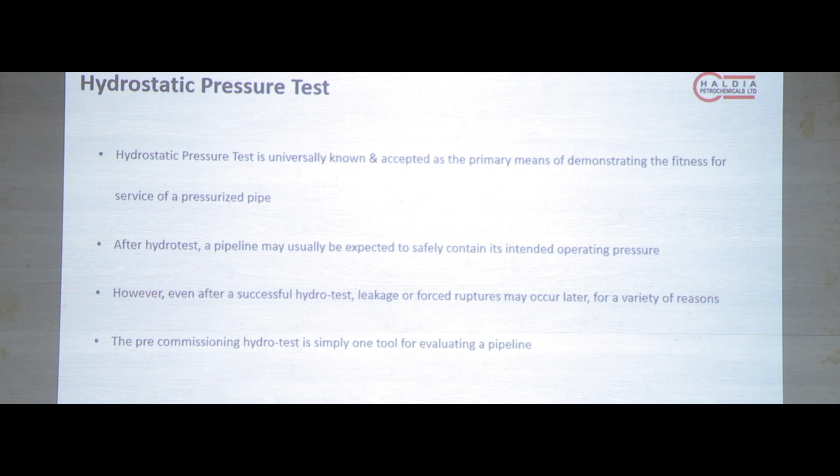No, for this distribution pipe also, you can collect or procure the sample on random basis, and you have to do all these tests, particularly for hydrostatic test. From this test you can identify whether a weak point is there or not. But should we do it before connecting the PPR pipe? Obviously you should do it. Otherwise, how can you assure that the pipe material has been supplied good quality or bad quality?

But our system should withstand the pressure along with the tap connection. Ultimately, so why should we do it before tap connection? My question is that because our system is to run with the all tap connection and that. Tap connections need a network, sir, network.

After forming the pipeline network, it will be very difficult for you to carry out this test. You cannot take out the pipe and do the testing. And these are standard tests and accelerated tests, and that is why these tests are mentioned in the standard.

Before laying up, starting the service, before laying up, to ensure the product quality during service.

No, I understand that, sir, but our system has to run along with all the tap connection and others. So it should carry the pressure at that time only.

My question is, when the standard is formulated or it is specified, these tests are specified in the standard, keeping in mind all these requirements, taking into consideration all these requirements. So once these tests are passed, that means it satisfies your requirements as per the BIS standard, and if these tests are passed, it means it will perform okay during the service life.

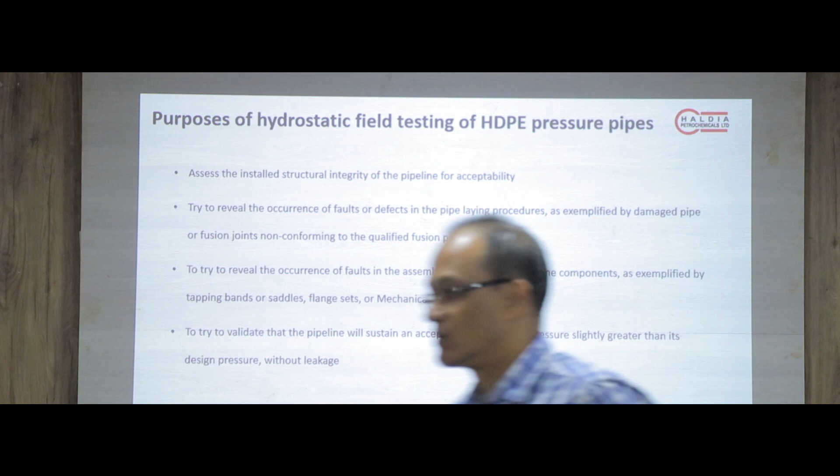It tries to reveal the occurrence of faults or defects in the pipe laying procedures, as exemplified by damaged pipe or fusion joints non-conforming to the qualified fusion procedures. During the laying up and jointing, if there is any minor fault, that may show up in the failure of the pipes, premature failure of the pipes.

It also tries to reveal the occurrence of faults in the assembly procedures for pipeline components, as exemplified by tapping bands or saddles, flange sets or mechanical joint assembly. This is also to validate that the pipeline will sustain an acceptable level of overpressure slightly greater than its design pressure without leakage.

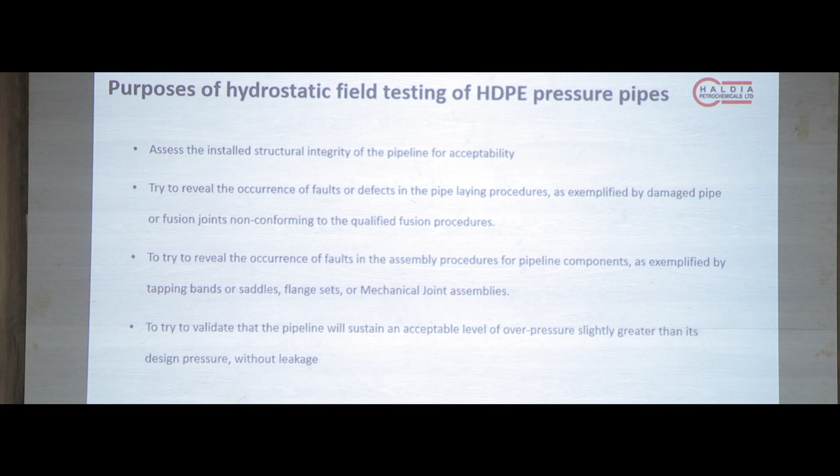Now, the concept behind hydrotesting is to strain the pipes, fittings and accessories. To strain the pipes means by putting the pressure, by inducing hoop stress, we put pressure in those areas to ascertain that there will not be any failure during the service life or during the transportation of the pressurized fluids. It may be water or it may be slurry or any other solvent.

During the service life, that should not show up, should not lead to failure of the product. So any defect from manufacturing is typically forced by stress intensification, which I was mentioning earlier. If there is any defect during manufacturing, it shows up, and that point acts as the weaker point, known as the stress concentration point, where the stress is concentrated, and that leads to premature failure.

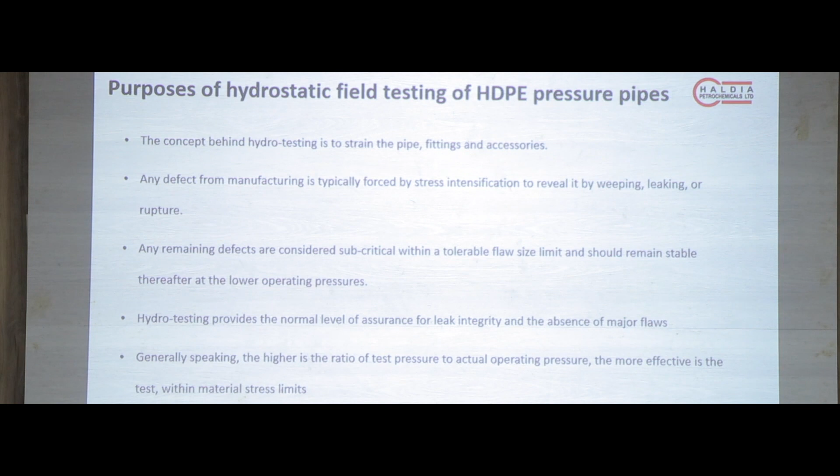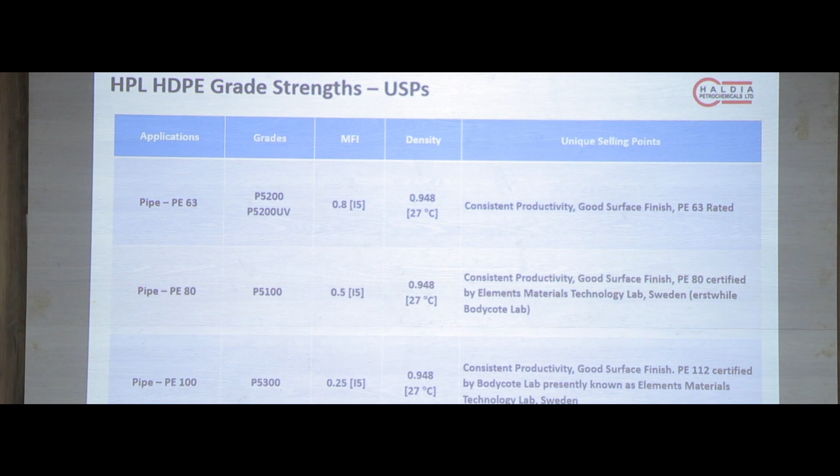These are our grades. These three grades we produce for three applications: PE 63, PE 80 and PE 100. The grades are P5200, P5100 and P5300. The MFI and density are mentioned. These grades are very much appreciated by the manufacturers and are performing very well in the respective areas of application.

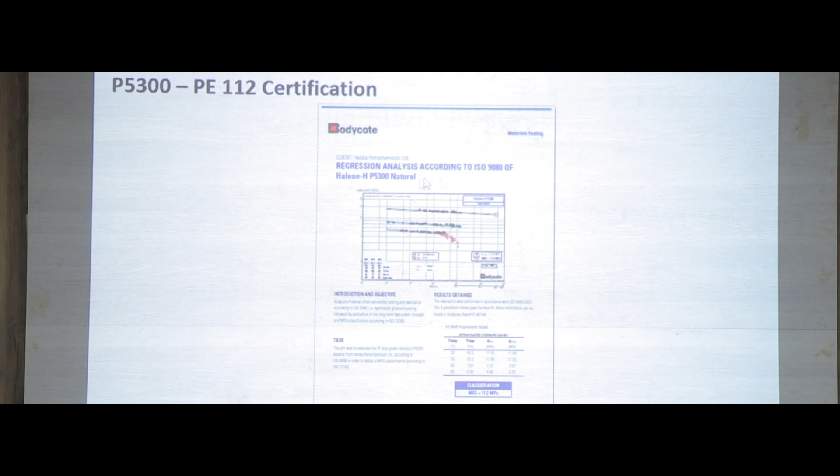This I have already shown you. This also I have already shown you. This also I have shown you. These are the advantages which I have mentioned so many times during the entire session.

This is a very lightweight and flexible pipe, easier to handle, long lengths can be laid in short time. HDPE pipe saves and conserves water compared to metal pipes, the chances of leakage will be minimum, and this is commonly joined by heat fusion.

Excellent hydraulic characteristics, extremely smooth inner surface, non-corrosive. Being a flexible pipe, it is softer and has certain elongation properties for which it can adjust its shape if there are any pressure surges during the transportation of the liquid during the service life.

There is a provision of socket joints also, but normally it is not done. The socket joints are put during repairing of any joints. Mostly those are for repair joints.

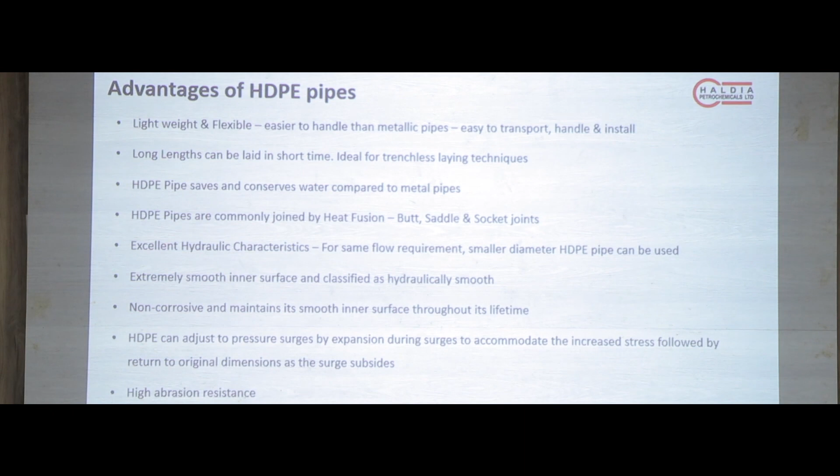The abrasion resistance of the pipes is very high, and that is why the energy requirement is very low. As a result, you may consider that the carbon footprint will be lower.

No corrosion. It is highly resistant to corrosive chemicals and corrosive solvents. And there will be minimum chances, or almost negligible chance, of biological growth or root intrusion in the pipes.

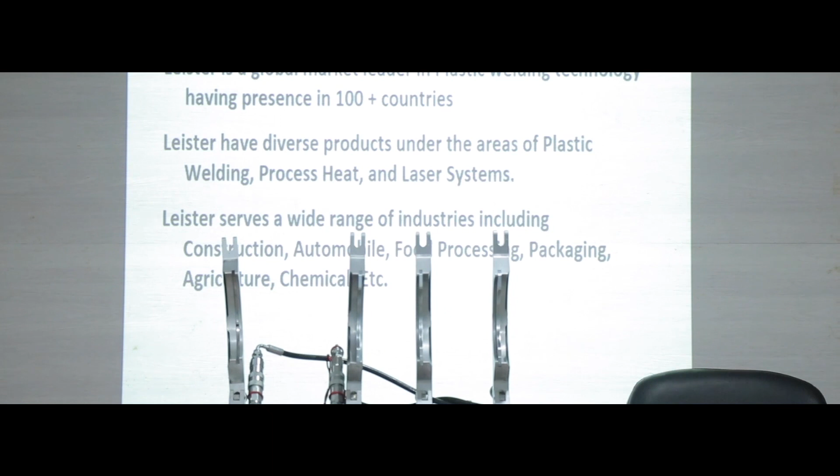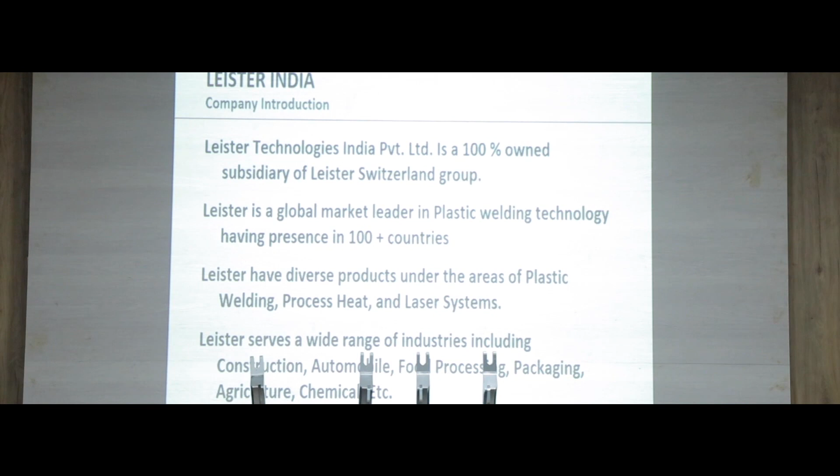We are Leister Technologies India Private Limited, a Switzerland-based MNC company. Leister India is completely owned by the Leister Switzerland Group. We are into plastic welding technology, and we have everything for plastic welding, right from flooring to roofing, furniture, automobile, and every other plastic welding application - we have machineries for all of them.

In India, Leister and Ritmo, an Italian company, has a strategic collaboration for selling plastic pipe welding products. Our relationship started from 2005, and before that, since the early 90s, Leister Ritmo has had a presence in India through major government agencies.

Coming to Ritmo, it is a pioneer in plastic pipe welding technology. This company has more than 4 decades of expertise in plastic pipe welding. We have been supplying HDPE butt fusion, electrofusion jointing machines to various industries, right from potable water, gas networks, industrial pipeline, desalination, etc.

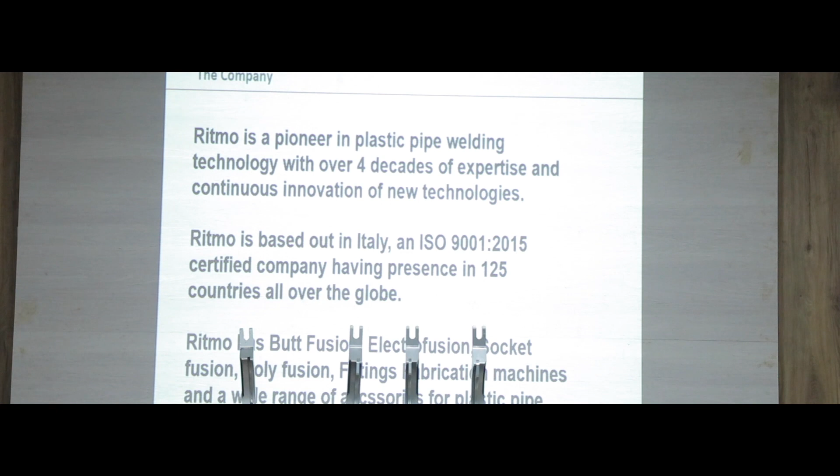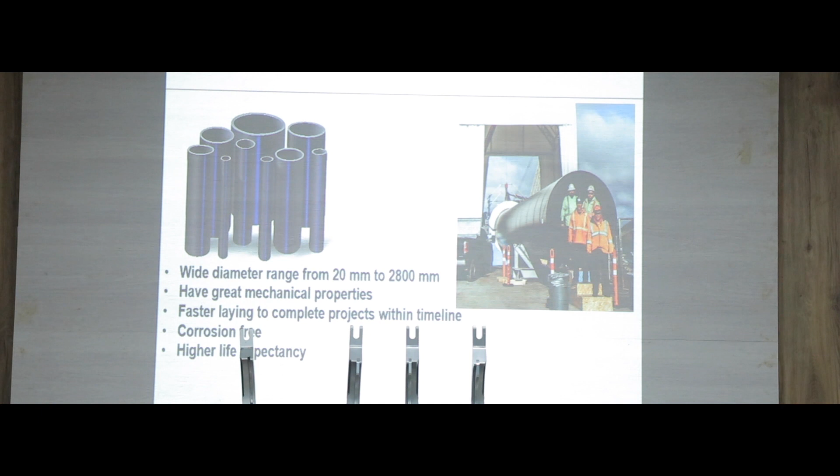So firstly, today our main agenda is to see the PE pipe joint. PE is nothing but polyethylene. Earlier, the Haldia team has explained completely about polyethylene and their properties, the resin characteristics and raw material characteristics, and everything. Thanks for this detailed explanation.

We'll just quickly see the main advantages of using PE for potable water networks. These pipes are being manufactured in wide diameter ranges, starting from 20 mm up to 2,800 mm, but right now in India the maximum is 2 meters in diameter. These pipes have great mechanical properties which can withstand field conditions, and this also helps in laying it faster in the field.

The projects can be completed very much within the timeline. As we know, the Jal Jeevan Mission projects are being framed into a shorter time duration. HDPE pipe is very much feasible to complete the projects. And moreover, these pipes have a higher life expectancy because they are corrosion free and have other mechanical properties compared to metal pipelines.

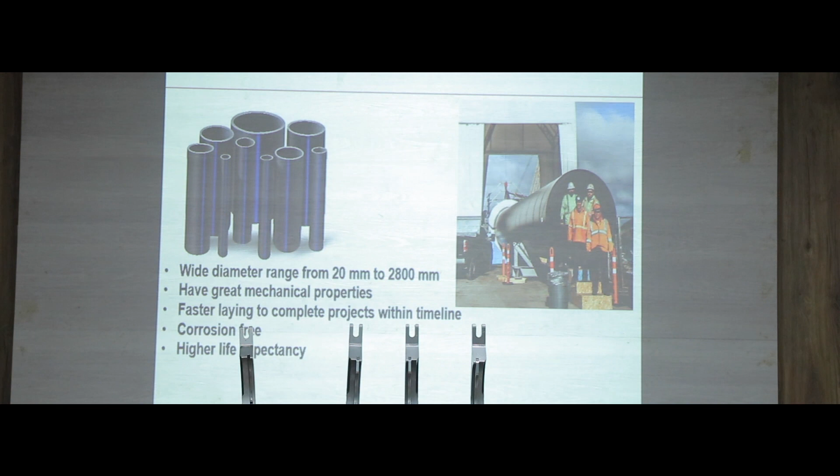HDPE or any PE pipes basically come under the polyolefin group, PE and PP, polyethylene and polypropylene. PE pipes can only be joined with the thermal jointing technique. Thermal jointing is the only way to join any polyethylene pipe, whether it is HDPE, that is high density polyethylene, or medium density or low density.

In water pipeline, the majorly used pipeline is high density polyethylene, which usually comes in black color with a blue stripe. As the earlier team explained, this blue stripe indicates water pipeline. Similarly, gas pipelines have a yellow stripe. So the first fusion process for polyethylene is butt fusion. Butt fusion, as the name itself means, is butting the two faces of the pipes, like this.

So this is the best jointing technique, because it is as good as a single extruded pipe. Suppose we are jointing 6 meter lengths of pipes: 6 meter plus 6 meter becomes a single 12 meter pipe. This is actually a seamless joint. Once we remove it, it forms a bead. I will show you during the demonstration. It forms a bead, but when we cut open the bead, this becomes as good as a single extruded pipe.

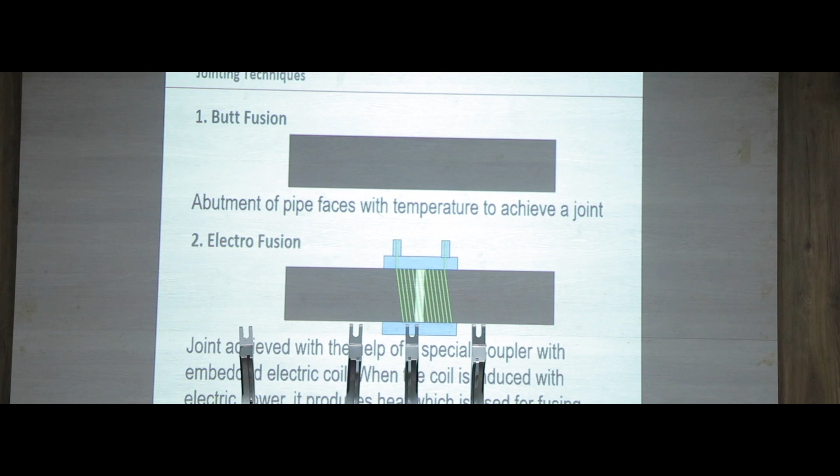And the second technique is called electrofusion. As we see here, the two pipes are joined with the help of a coupler. This coupler has an inbuilt electrical coil. I'll just show you the coupler. Can you make a joint practically? Yes, definitely, sir.

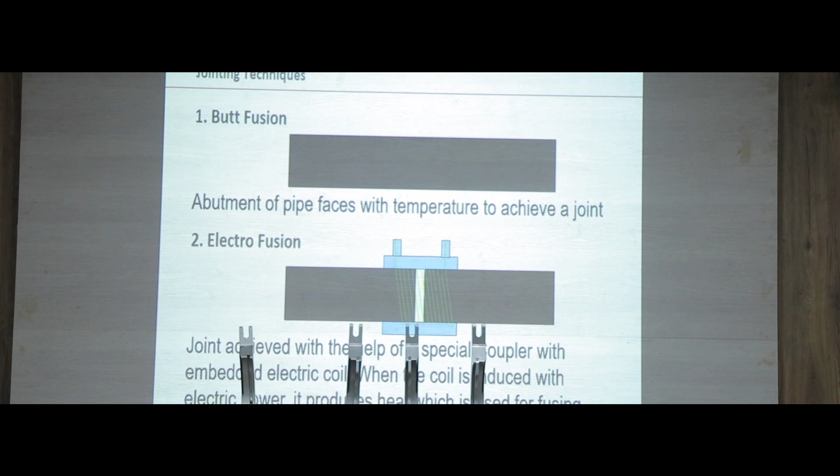This is the coupler, and it has an electrical coil inside the inner periphery, with 2 leads taken out here. We will apply a current across this coil, so when we apply the current, the coil gets heated up. Once the coil gets heated up, the ID of the coupler and the OD of the pipeline get heated, and this forms a homogeneous joint.

For that, this coupler has to be of the same material as the pipe. Suppose we are using HDPE 80 grade, then this coupler also has to be HDPE 80. This has been printed here: PE 80, SDR 11, diameter 110. So it is 110? Yes, sir, 110.

How much does it cost? Sir, we don't manufacture these couplers. There are coupler manufacturers; I'll let you know about them. These are expensive, sir. But if you want, we can give you the contact details for all the electrofusion joints.

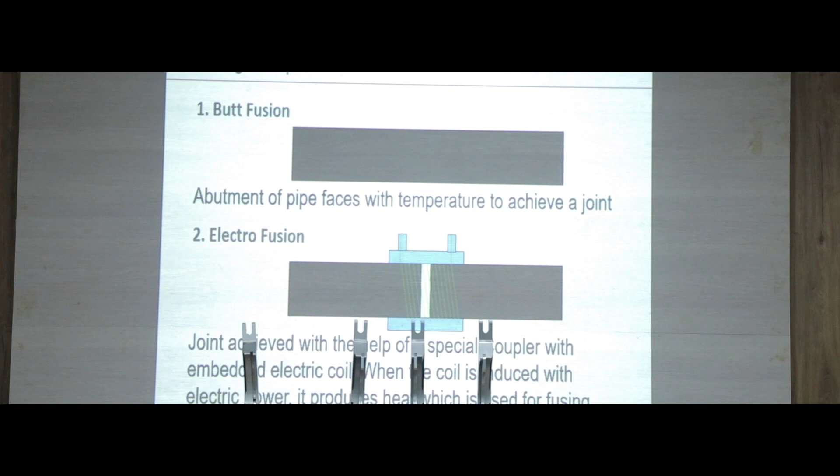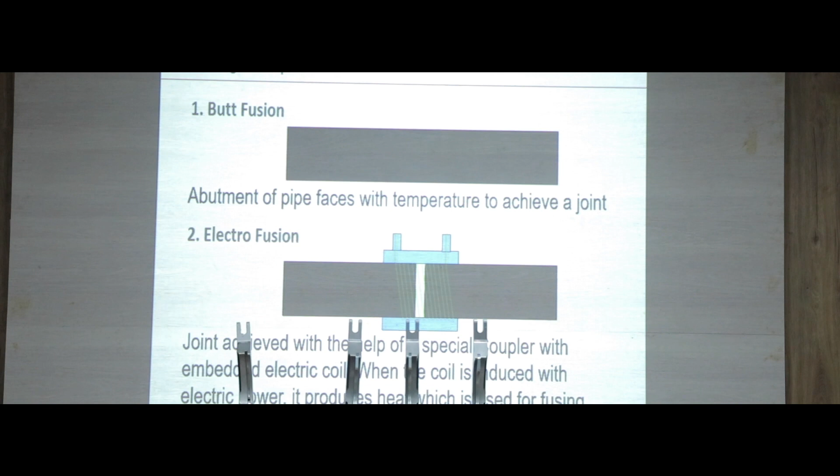The main difference between these 2 joints is that in the butt fusion process, the initial capital for the machinery is more, but every joint is free because we use the same material. We heat the same pipe and join it together. Whereas in the electrofusion joint, every joint requires this coupler, which is an additional cost for every joint.

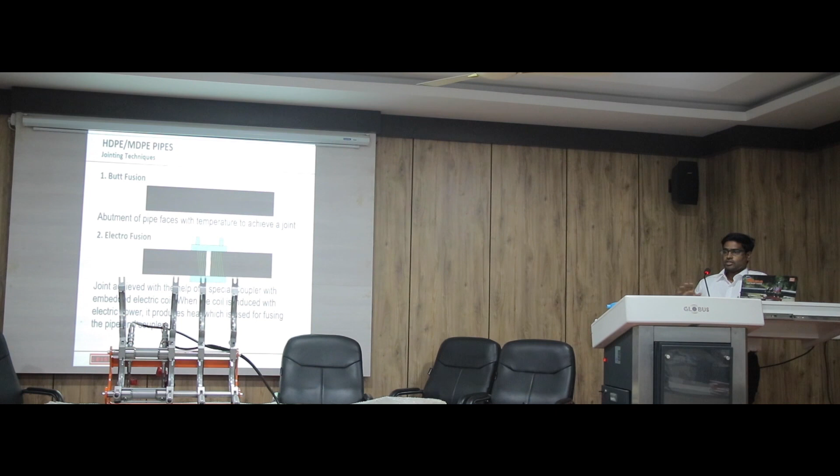So basically, the coupler joint is preferred for lower diameters, less than 90 mm, since the pipe comes in coils of 200 meters, so the number of couplers used in the network will be lesser. For lower diameters less than 90 mm, the pipe comes in coil form, like 200 meter or 150 meter coils, so fewer couplers will be required. Fewer joints, because you get a single pipe length of 150 meters.

That is obvious because it will be less than 75 diameter pipe. What he is suggesting is that in that case these joints can be preferred, as the cost will come down. But the best way is always butt fusion. So let's see butt fusion in detail.

These butt fusion machines are manufactured to standard ISO 12176. This standard governs the manufacturing and design of butt fusion machinery, and it is used globally, not only in India. The welding procedures follow DVS 2207, and ISO 21307 is also a standard used for welding procedures and welding parameters.

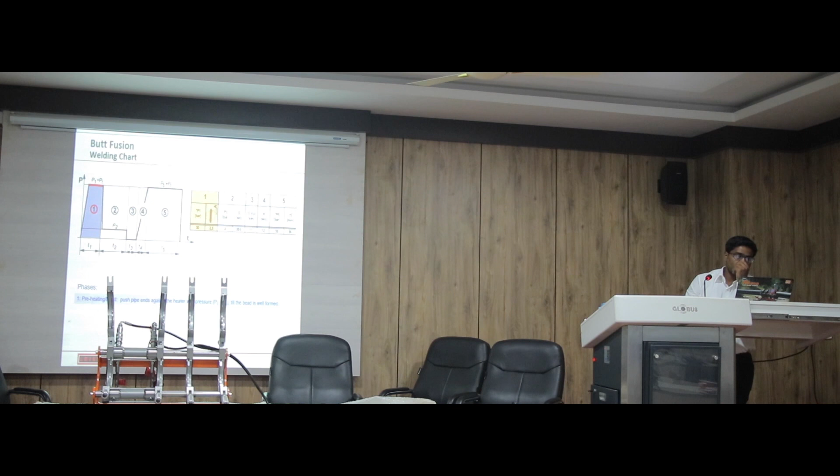So here we have the welding chart. The first phase is called the preheating phase or bead up phase. During this phase, we preheat the pipe faces. Both the faces of the pipes are preheated at a temperature specified in the chart with the pressure P1 plus Pt. P1 is the pressure from the welding chart.

P1 is the pressure from the welding chart, and Pt is the drag pressure. That is the pressure required to pull the entire pipeline. Suppose at field we will be jointing a single length of pipe of 6 meters, or maybe 5 lengths of pipe of 30 meters. We may have to pull 30 meters, or we may have to pull 6 meters, like that.

So this Pt is a changing parameter. That is not a constant. That varies based on the field condition. So Pt is the drag pressure. We need to measure that with the machine. Pt is the pressure at which the carriage starts moving. This machine has a movable and a fixed carriage. The movable carriage moves with the help of hydraulic pressure, and the pressure at which the carriage starts moving is called Pt, that is drag pressure.

So the second phase, during the heating, once we achieve the desired bead thickness of 2.5 mm as mentioned in column 1, we will drop the pressure to a value equal to or less than drag pressure. Then we will maintain up to time T2. Once the time T2 is completed, as I explained, in the first phase we are closing, and you may see a bead form, and we reduce the pressure.

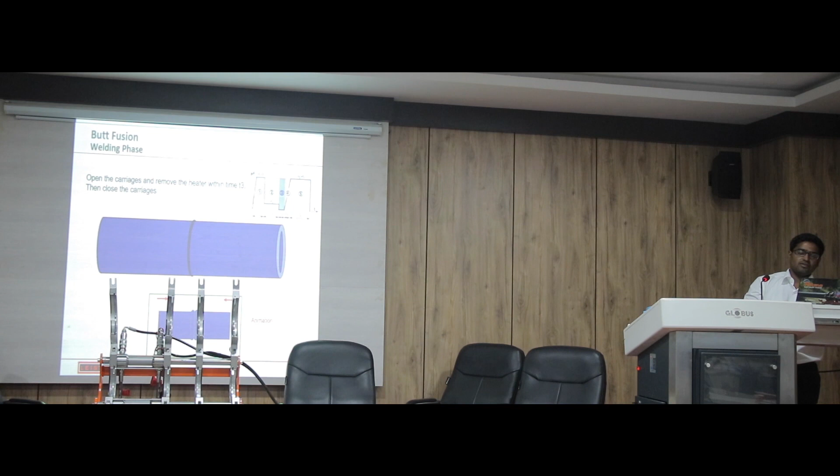And in the third phase, we remove the heating plate. In the fourth phase, we close the pipe. And in the fifth phase, the welding happens, and then you may see the bead formed in the center, the cross section of the bead also. This is how a cut section of a butt fusion joint will look. You will have an internal bead and an external bead, and on both pipes there will be a bead. So it is a twin bead, internally and externally.

If you cut open this bead, this pipe is as good as a single extruded pipe. Both pipes will look like a single extruded pipe. So this is all about butt fusion. I hope the process is clear.

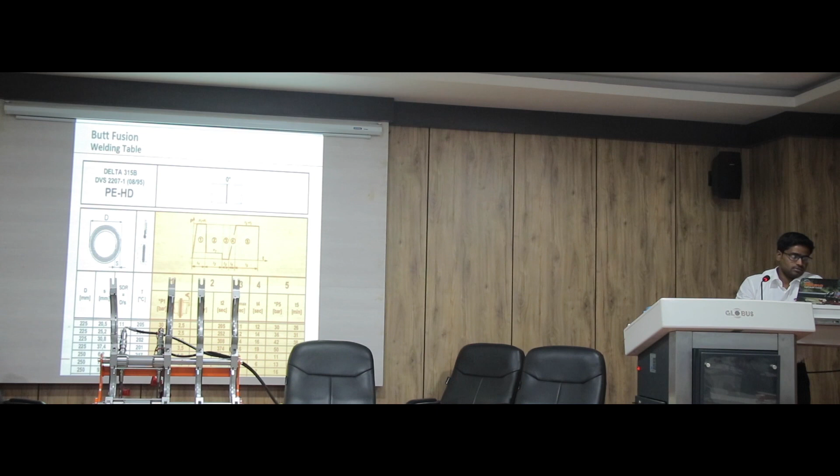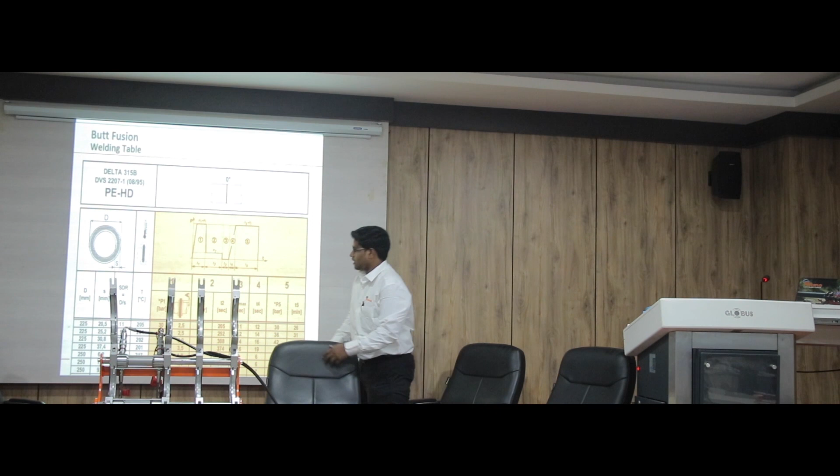Temperature, like preheating time, is some temperature defined? Yes, it is defined in the chart, sir. How much? I'll just show you. So suppose in this chart, the diameter is 225, the temperature is 205. For PE pipes, it is mostly 190 plus, just above the MFR temperature. This is 205 centigrade. What is the melting temperature? Melting temperature is 190, sir. 190 for HDPE? PE, polyethylene. 190 for PE, and this is just above 190. And it will be up to 230, sir.

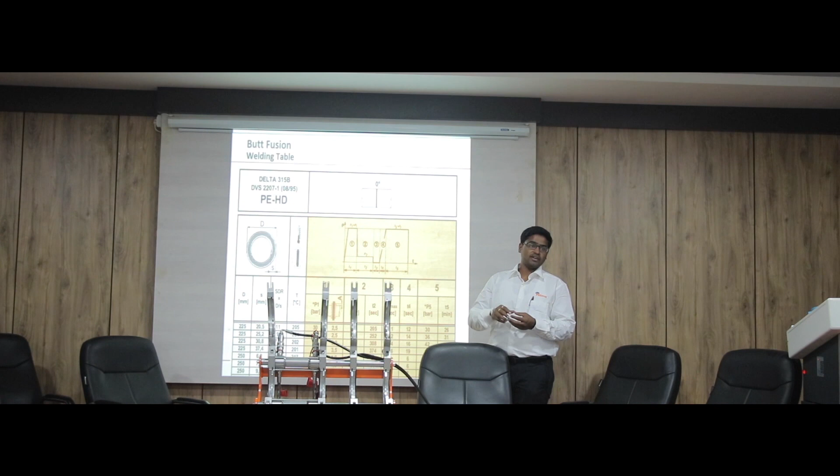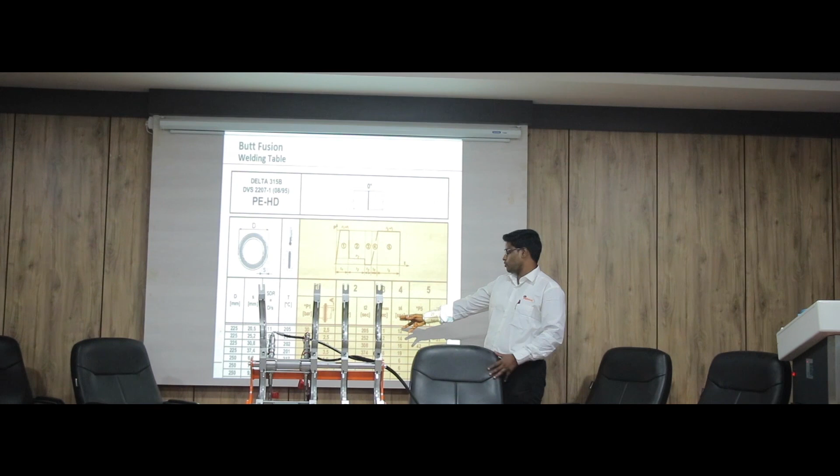Up to 230. And the time lag from T1 to T5, how much time will it take? That varies with the diameter and thickness, sir. Suppose for 225, we have 205 seconds for the initial welding, and we have a cooling time of 26 minutes. So it will be around 30 minutes for a 225 diameter joint. For 110, it will be like half the time. Average, per joint it will be 15 to 20 minutes.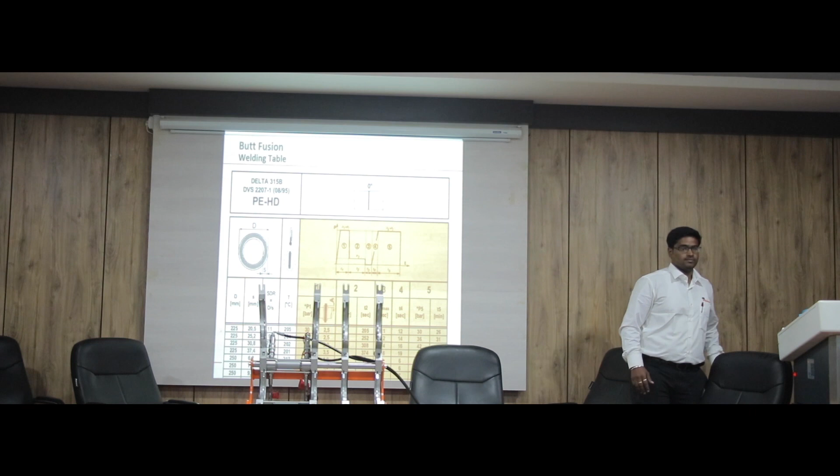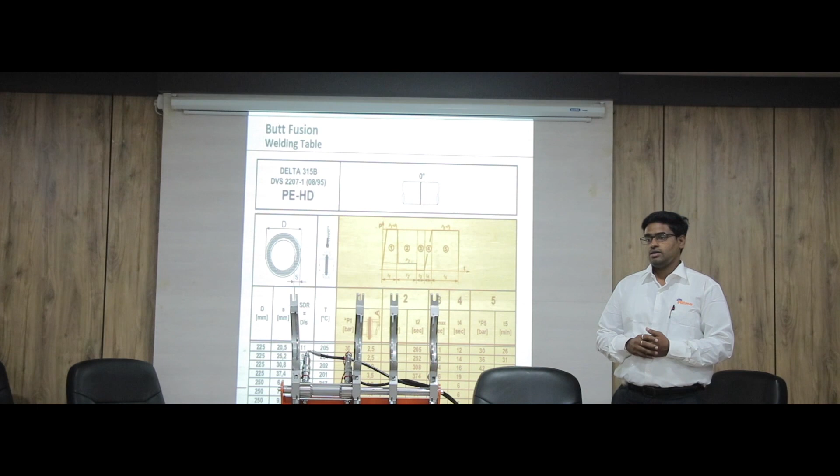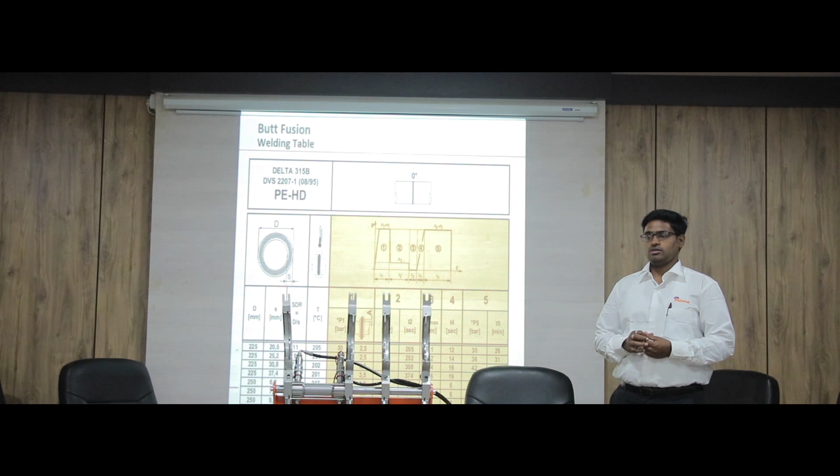There is one point. These pipes and joints are not time tested in our state, because this is the first time we are using HDPE pipes. During your career, did you receive any complaint of leakages? How long have you been in this business? 5 years, sir. Well, 5 years is a very short time. These are not time tested. What does the literature say? It's robust, sir. Literature will say a lot of things.

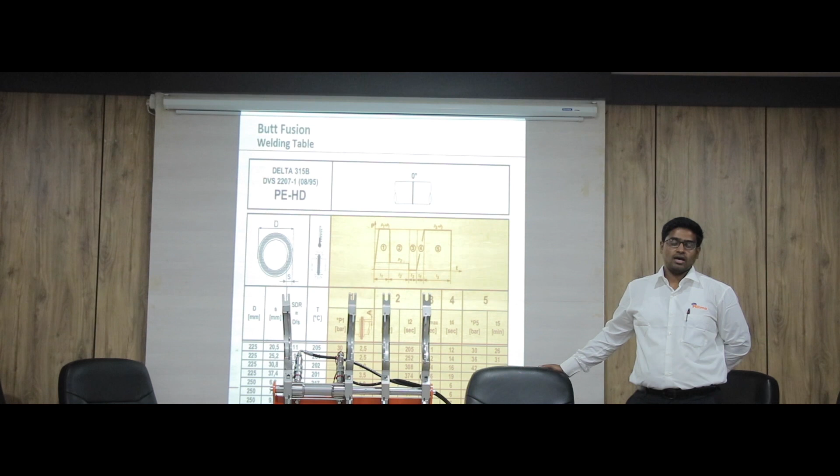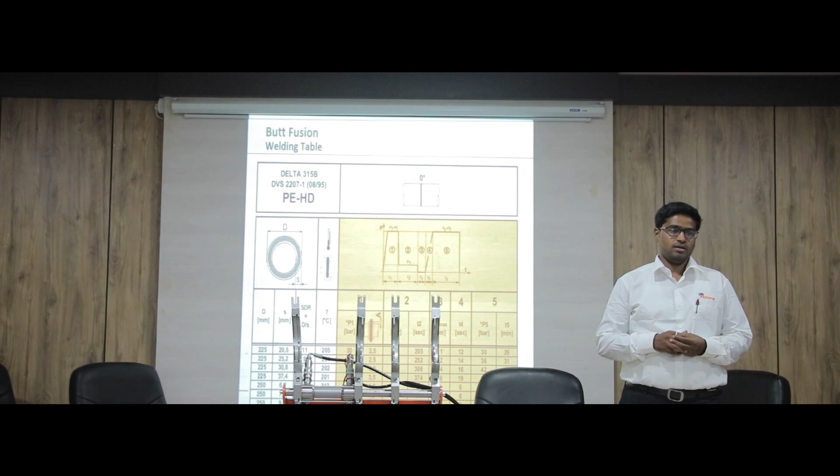No, sir, for the jointing also there is a standard. It is not an IS standard, it is an ISO, international standard. If you want, I can share it with you. My point is that our observation is we are doing this at a huge rate. Suppose an executive is handling more than 500 schemes at one time. So maintaining the operating procedure is not easy, because the works are done at the rural level, in an unorganized manner, with no skilled or organized team, and leakage on joints has also been observed.

But plumbers can become experts after, say, a week. This is not a very difficult thing. This requires 2 to 3 days of training. Within a week of training, a plumber can be an expert. And sir, this jointing is to be done above the trench, before laying the pipe.

It has to be joined. Somebody will be sitting only, he will be doing the jointing. So in the jointing part, he will be very, very expert. I have seen in many places, in 1 hour for PE100 pipes, he can do the jointing of up to 10 numbers. That depends again on the size, sir, diameter.

Again, he has mentioned size as well as the PN rating. And depending on the PN rating, the thickness will depend. Because if you use PN6 pipes and PN10 pipes of the same diameter, the PN10 thickness is much higher. So for melting this higher thickness material, it will require more time.

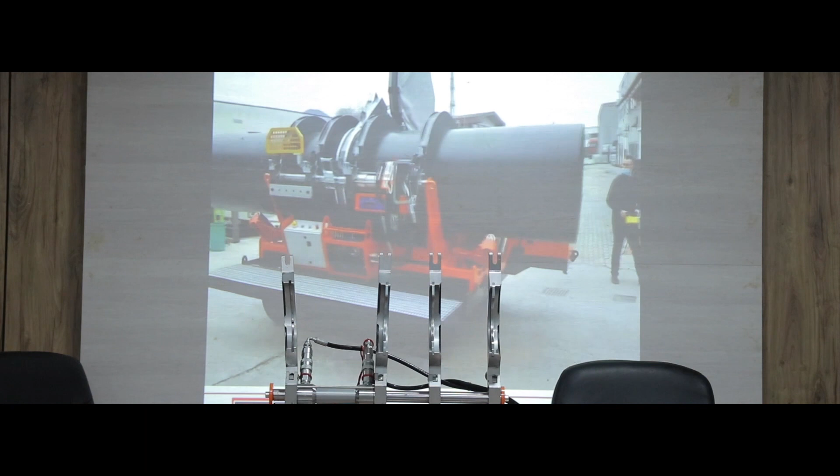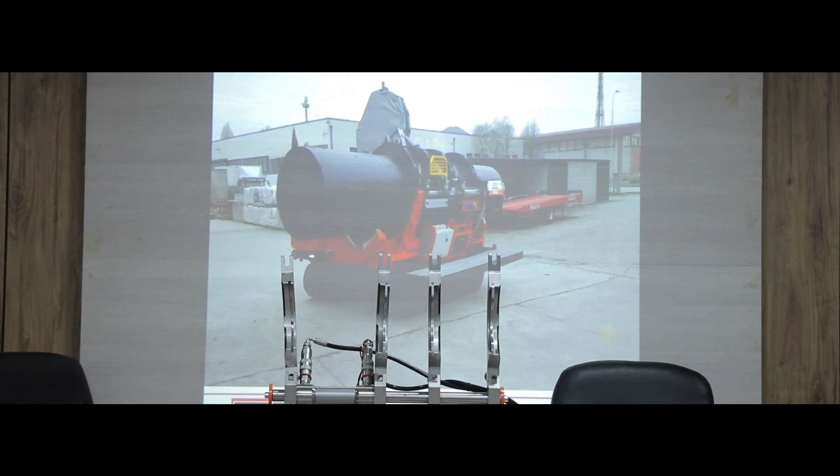Up to 1600 mm diameter we have machinery. This is a fully tracked, fully automatic, remotely controlled machine of 500 diameter, and in this variant we have up to 2 meters. This machine is being used in Lakshadweep and Andaman Nicobar Islands for desalination projects for NIOT, National Institute of Ocean Technology, to give them clean water. They carried out this project with pipe made from our HDPE material.

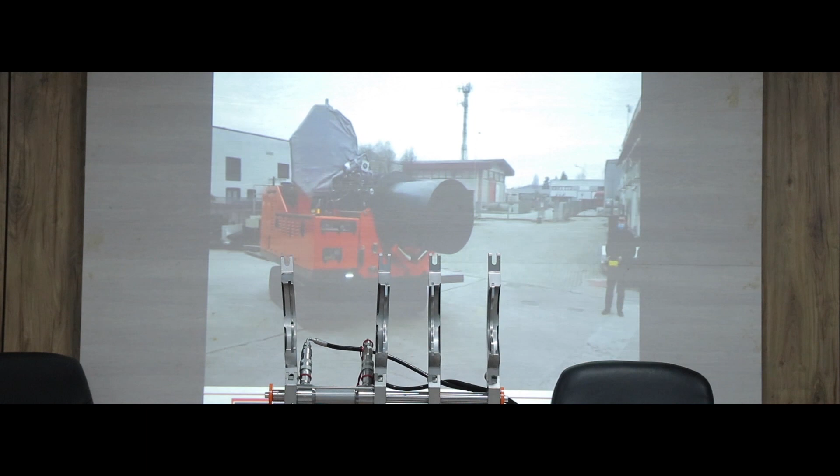Now there is one more project going on at Agatti Island of Lakshadweep. Sir, are there any doubts in the butt fusion process? I hope everyone got the basic terminology and understanding of the butt fusion process. We will see that through a live demonstration. I think if you demonstrate, it will be clear. Yes, sir. After this, we will introduce the terminology and have a demonstration.

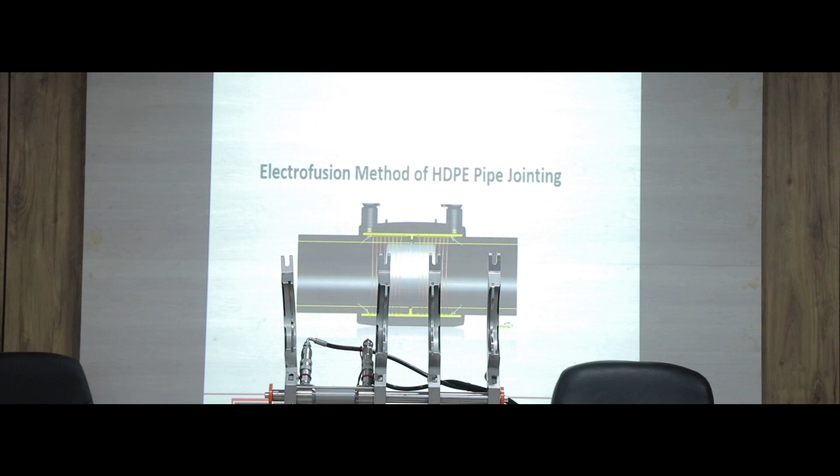The next technology for HDPE pipe jointing is the electrofusion method, sir. As I already told, for every joint we need a coupler, which has a coil inside. In the electrofusion joint there are 3 parameters: voltage, the electrical resistance of the coil used inside, and the welding time. This joint takes much less time, but the effort is more.

Why? If we carry out a repair joint with butt fusion, it takes more time, but the effort is less. Here the welding process takes less time, but the effort is more. There is no proper technology for inserting the coupler; we don't have a hydraulic or any system developed for putting it into the pipes. It has to be done manually or with hydraulic presses, and making a repair joint of higher diameter is very difficult with this one.

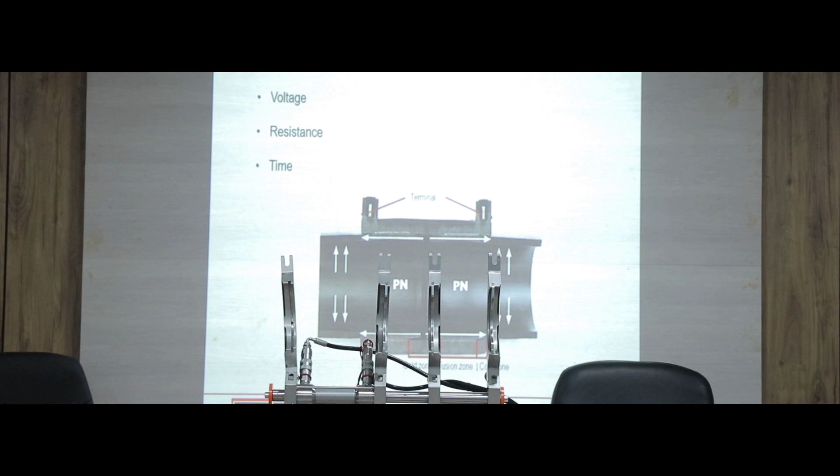Butt fusion is always preferred. So voltage, electrical resistance, and time are the major 3 parameters for electrofusion. Now we'll see a small animation about electrofusion. As I told initially, the pipe has to be prepared, scraped and cleaned. Then the coupler has to be inserted and current passed through the coil, so that the ID of the coupler and OD of the pipe get heated and melted and form a homogeneous joint. So we'll see a small animation.

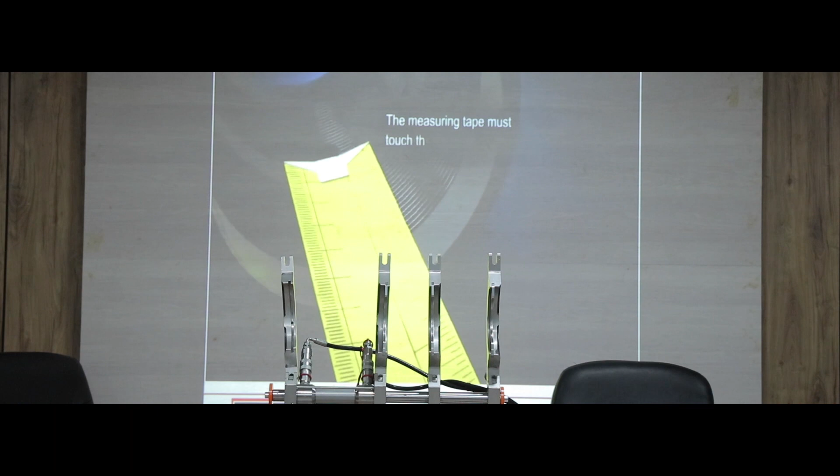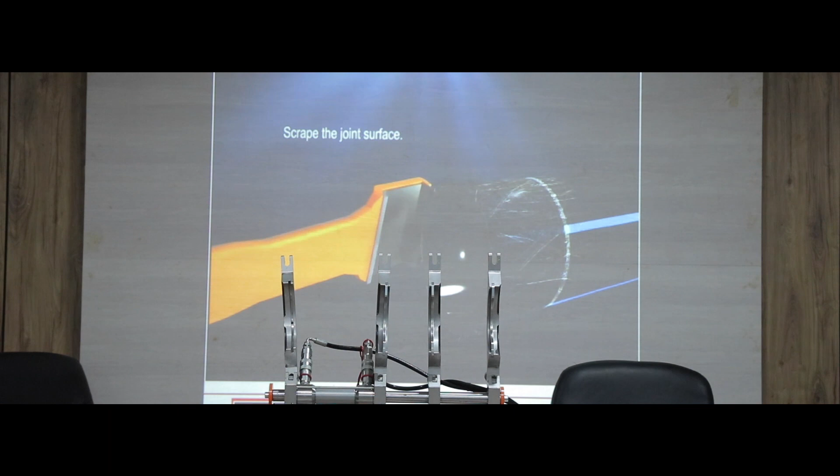Scraping it out on the pipe, just to remove the dirt particles or whichever is accumulated on the pipe.

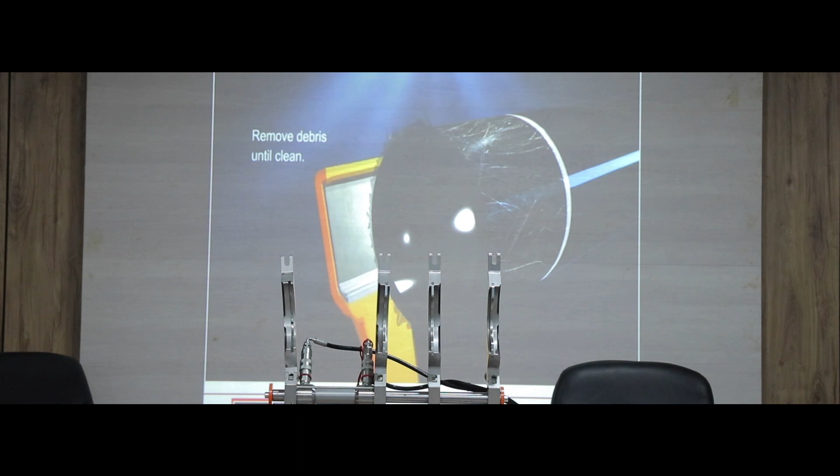The pipe surface and the coupler ID has to be cleaned with IPA solution.

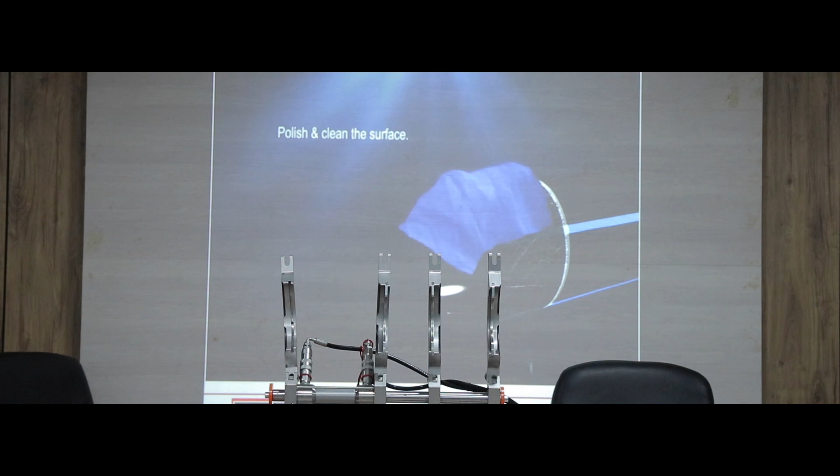Then it has to be properly aligned, with the help of an aligner. This is the aligning tool.

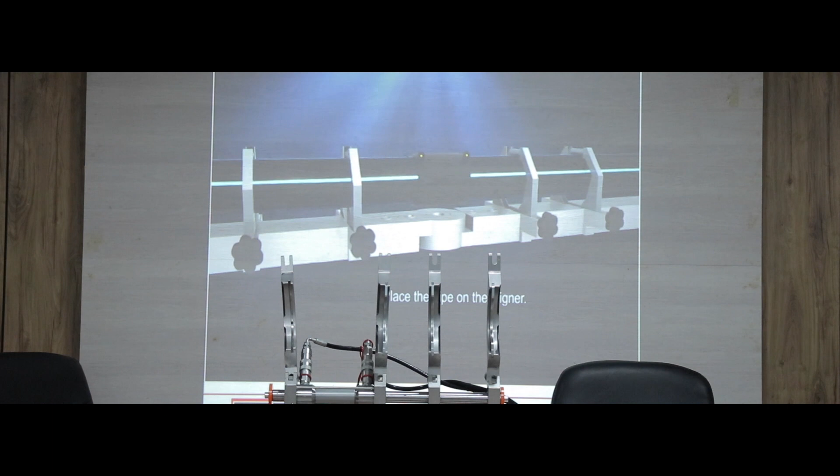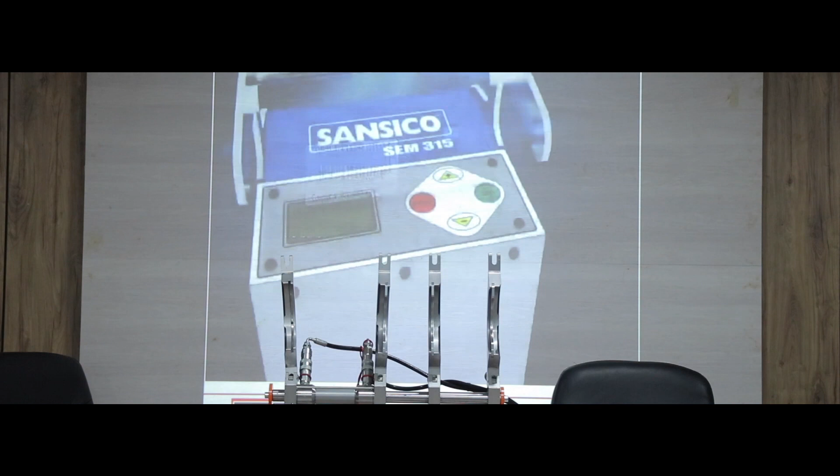Then the electric terminals are connected across the coupler. In this process, there is a barcode scanner. All these couplers come with a barcode, so the parameters are embedded in the barcode. You just scan the barcode and the welding automatically starts.

There will be an indicating plug. Once the welding is done, the plug will pop out.

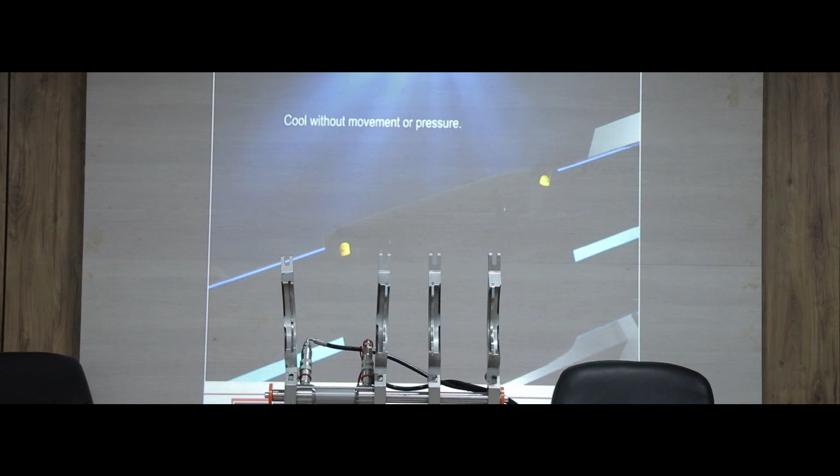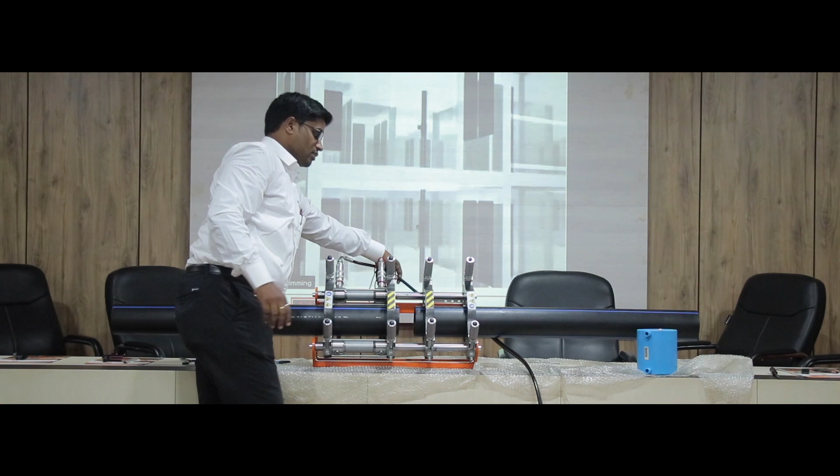This part of the system is a mobile carriage. This is connected with hydraulic hoses to the hydraulic system, so this moves forward and reverse.

So what we do is, before performing the joint, this is the milling cutter, sir. As I already told you, this rotates, and during outside this will not operate, only if we engage into the system.

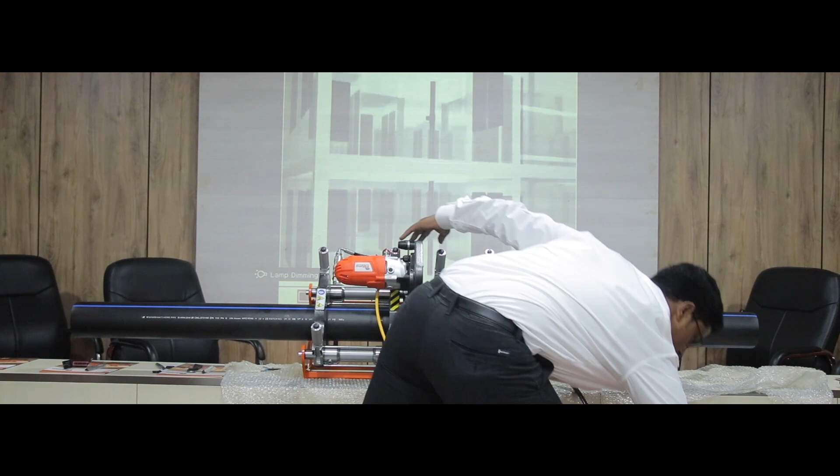This will operate once engaged into the system, and it will face off both the ends of the pipes.

Like this, the strips will come out. Short strips mean this is not yet ready. The strips will come out the complete length of the diameter of circumference of the pipe. Suppose if both sides are uniform, then the strips will be long strips, you get long strips. That means the pipe is ready.

Once after preparation, we set it for 210 degrees Celsius. You can see it is heated for 210, set for 210.

We engage the heating plate in between, and we close this. Once we close this, what happens is it closes to the specific pressure which is mentioned in the chart.

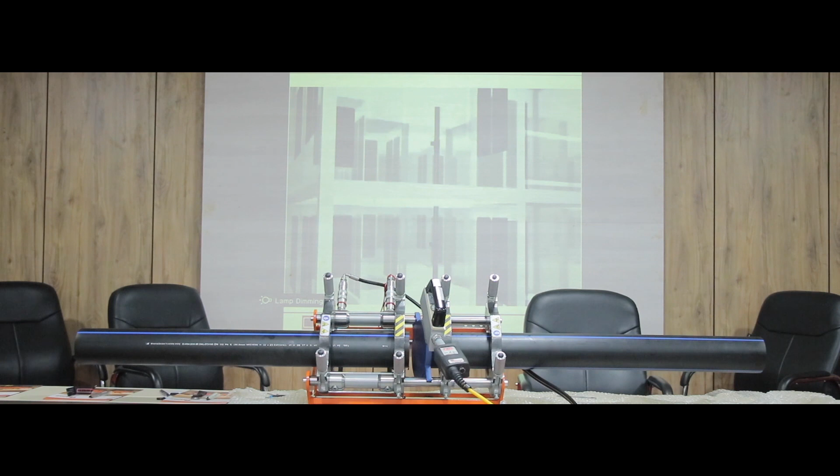I'll just show you, pressure will be maintained from this system, sir. That is not happening now. The meter is the piezo, like pressure meter. We have a gauge over here, you can see here. This gauge has a pressure gauge, and we have a pressure setting and pressure regulating valve, and to open and close we have a throttle.

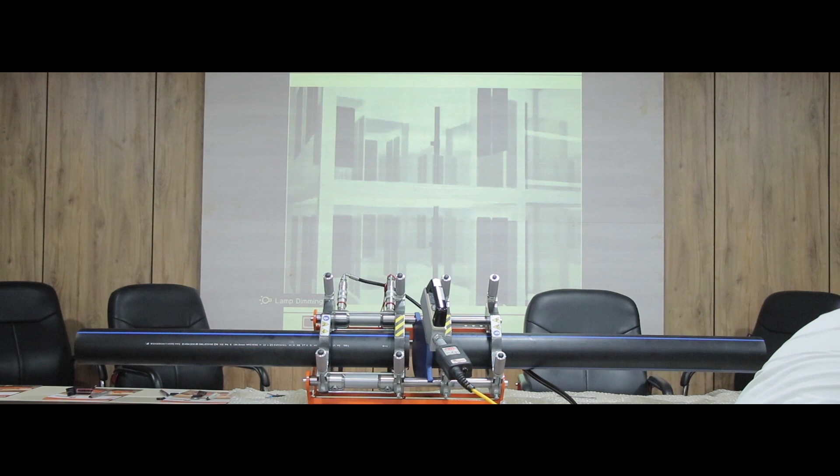How will you adjust the drag pressure? I'll show you, sir. Drag pressure is measured after making the setup, we slowly adjust the pressure, and at what point of pressure the carriage starts moving with the load of the pipe, that point is called the drag pressure.

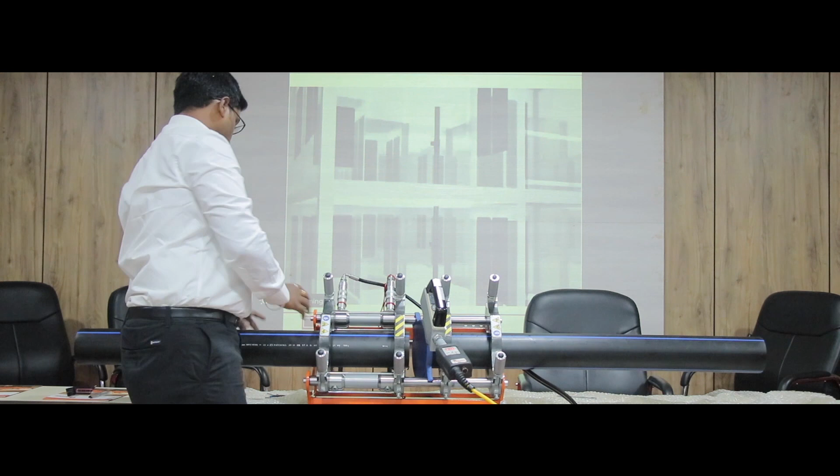So I'll explain you, we measure the drag pressure. We make the setting up. Suppose here at field we will be having a long pipe over this end, but usually it is preferred that the new pipe is fixed at this end, that is the movable end. And the fixed end of the pipeline, which is already existing, is to be set at the stationary end.

Existing pipeline is on the stationary end and the new pipe is on the movable end, because it has already been laid, yes, fixed. Already laid, yes. And also less load applies on this side, we need less pressure to join.

So to measure the drag pressure, after making the setup, we slowly adjust the pressure setting on the hydraulic system. At what point of pressure the carriage starts moving, that is called the drag pressure. After doing that, after measuring the drag pressure, I'll show you the chart, sir.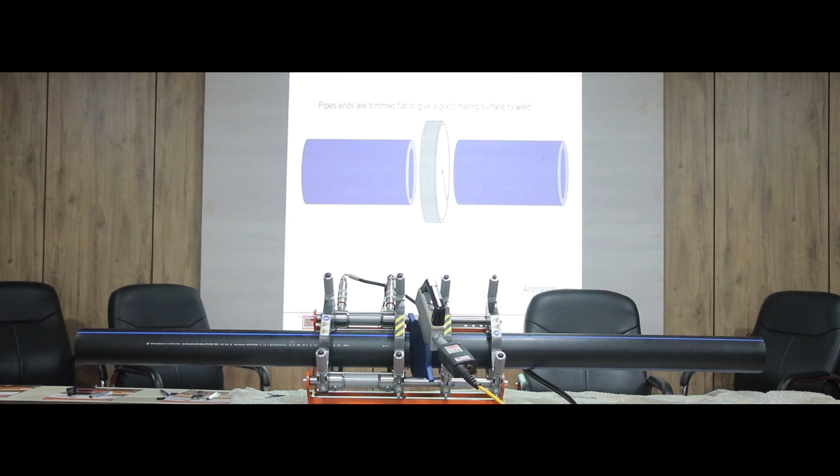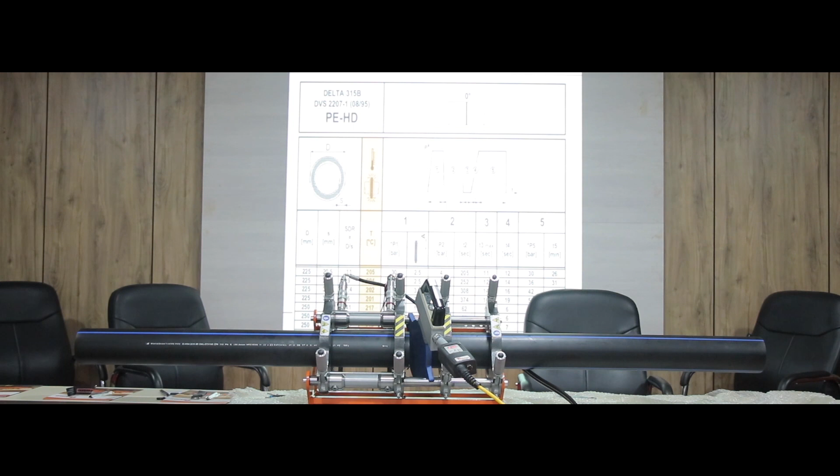So we have here the temperature, already we set it on that heating plate. Then we need the bead thickness, which we can calculate from the chart. And we have 110 mm pipe now.

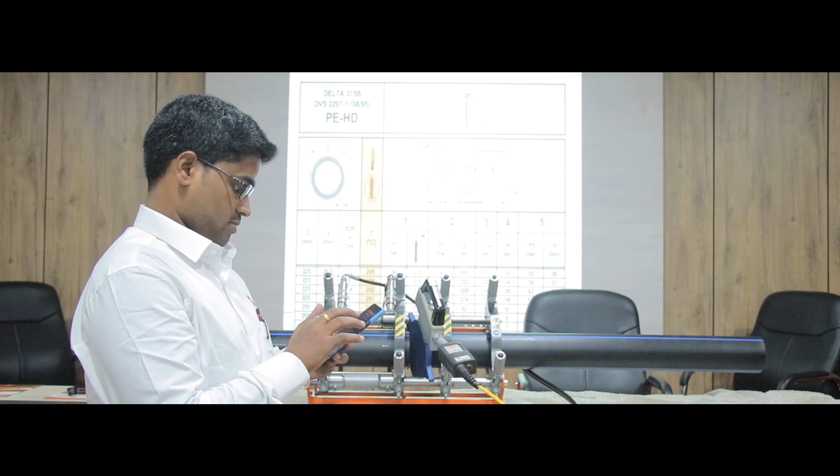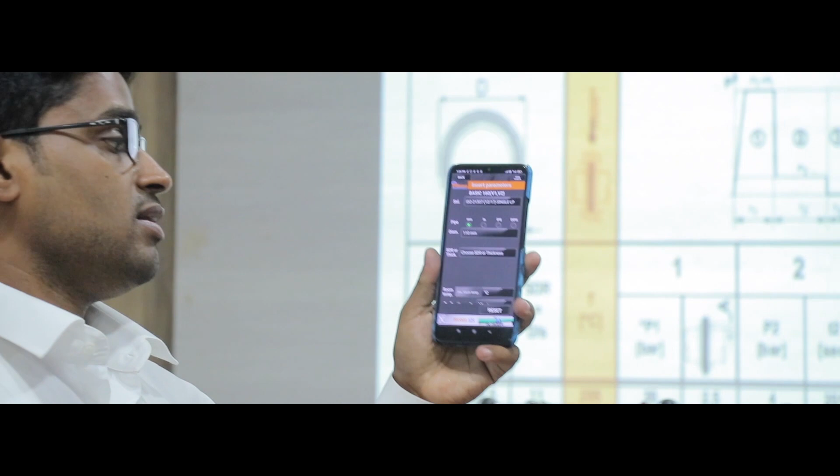So this is the home screen of the application which I told you. Here ISO 21307 is the standard which is being widely used for pipe jointing globally, not only in India but internationally. And the pipe diameter today we have is 110 mm, and the SDR ratio we have is 21.

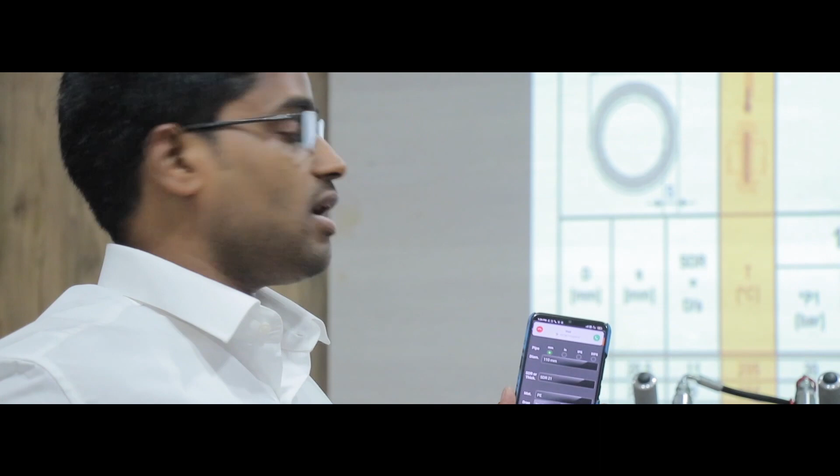That is set. Then the drag pressure - we don't have a higher length of pipe, so the drag pressure would be less than 5 bar. So we set 5 bar, and we have a room temperature of about 28 or 30 degrees.

Then if we start calculating, so we have the parameters in hand. The heating plate temperature to be set is minimum 215 degree, nominal 225 degree, and maximum 235 degree.

The bead-up pressure, that is the drag plus welding pressure, is 20 bar and 1 mm of bead is required. For this pipe, only 1 mm of bead is required.

Then the heat soak time is 72 seconds, and the total cooling time is 8 minutes 53 seconds. So 72 seconds is somewhere like 1.5 minutes, and this is 9 minutes. So the total welding time would be around 11 to 12 minutes for this pipe.

The drag, total pressure, and welding time - you give the input of the length of pipe to the drag, and it will give a drag pressure. No, drag pressure has to be measured at field, sir. You have to start adjusting the pressure value. At what point the system starts moving, that is the drag pressure. You have to measure it at field.

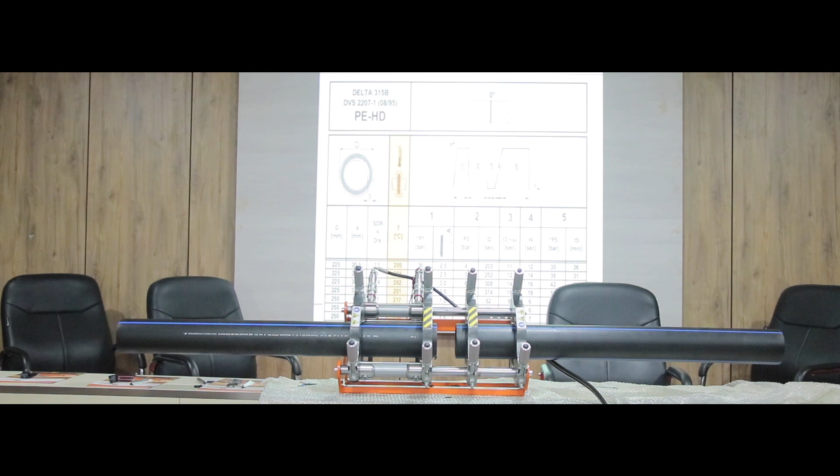After initial heating, again it has to be made cool, no? Yes, sir, then only it will get ready for the fusion. What time need to wait after initial heating? That is, as per the system, 8 minutes 53 seconds, that is 9 minutes for cooling in the system.

First thing, you have cleaned the edges. Then the pipe is dragged. Then you have defined the bead size and all. That is 76 seconds initially.

We put the 76 seconds initially, we have to wait. After bead formation, we have to wait for 76 seconds. After 76 seconds, we have to remove the heating plate and engage the pipes back together immediately - we have 6 seconds here.

T3 and T4 is there, na? T3 is the blank time, that is 6 seconds. Within 6 seconds, we have to remove the heating plate, and within the next 6 seconds, we have to close it back and engage the pipes together. So what happens is the bead becomes thicker.

So in time T5, the welding starts - that is cooling under pressure. It's called cooling under pressure. That time also pressure will be less? No, higher pressure, you can see that in the graph. The pressure, that is a time versus pressure graph, sir.

Initially pressure goes from 0 to P1 plus P2, then drops to P2. Then again we open the system, the pressure becomes 0. Then immediately we ramp up the pressure, it goes to the initial value, and we maintain it for the cooling time. After cooling time we remove it, then the joint will form.

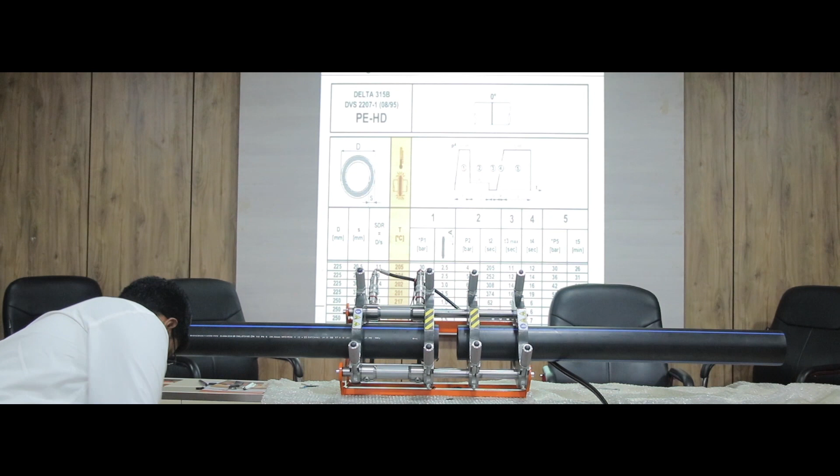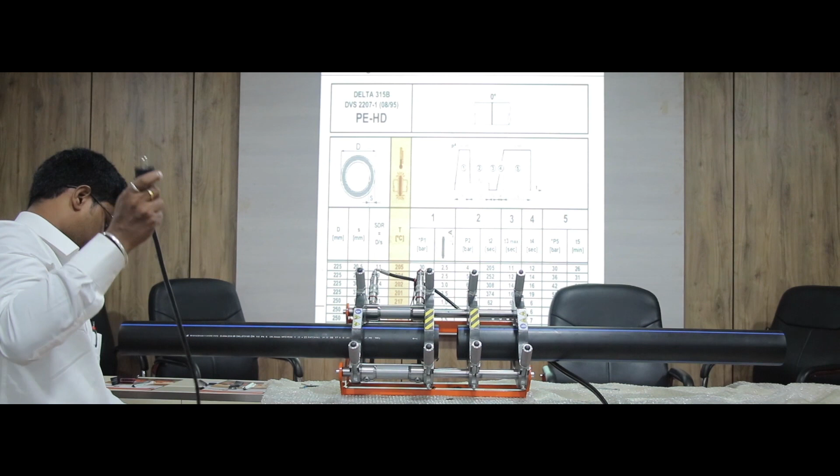So is the heating recorded at both ends or only one end? Sorry sir, is the heating done at both faces or only one? Both the faces, sir. Heating is required on both the faces. When we close, both the faces will get heated up.

But both will expand? The butt is there, it will be expanded. One part going to the other, right? Not going in, just butts, sir - butts against the face.

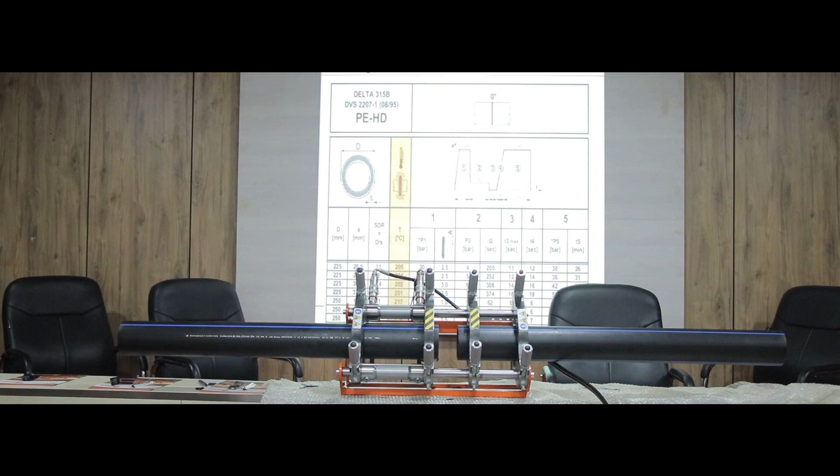Just like this, sir. It will just butt - that's why it's called butt fusion. Just butts together and gets a fusion. That becomes like a single pipe, of the same diameter. This is 1 meter, this is 1 meter, and this is 1 meter. So when we join, this becomes a single pipe of 2 meters.

The heating area - heating area. What happens is after heating, this space gets heated, sir, and this space also gets heated. Once we join, this face and this face will tend to roll out. Since it is flexible and it's plastic, thermoplastic, under pressure this will roll outside on both the sides. That rolling out is called bead. That forms when we join with temperature. That forms on both OD and ID also - both this outer area and this area will tend to roll out.

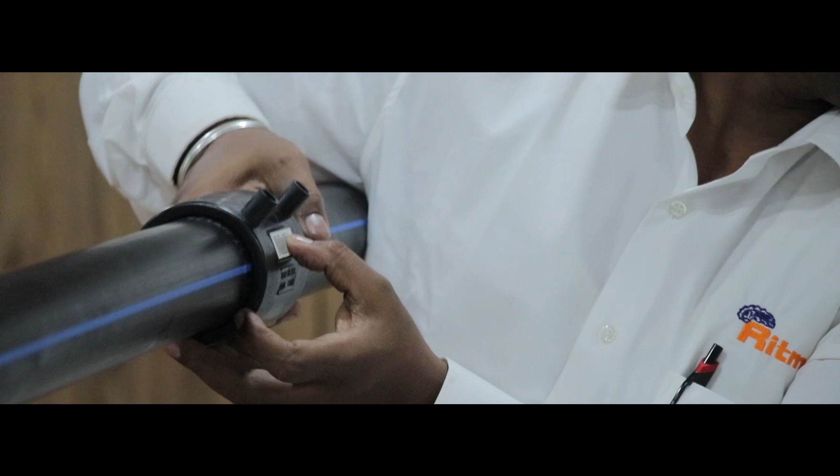Inserted - I'll just show you row by row. You can see this is the barcode, sir. The barcode has the fusion time clearly mentioned. This is 65 seconds and the cooling time is 7 minutes. So the total time taken is 7 minutes 65 seconds. This parameter is embedded inside the barcode. Once we scan with our barcode scanner, this will get entered into the system automatically. So every electrofusion joint will have this parameter embedded inside that.

And we have something called an indicative plug - these two are called indicative plug. Once the welding is over, this will pop out. That is the indication that the welding has happened successfully.

I'll just show you row by row - you cannot see that, you can see that. This is the indicator plug and this is the barcode embedded from the manufacturer. Here it is, this is the barcode. Once we scan, automatically this gets set into the system - reducing socket joint. Here is the indicator plug.

Crosses are there, X joints are there.